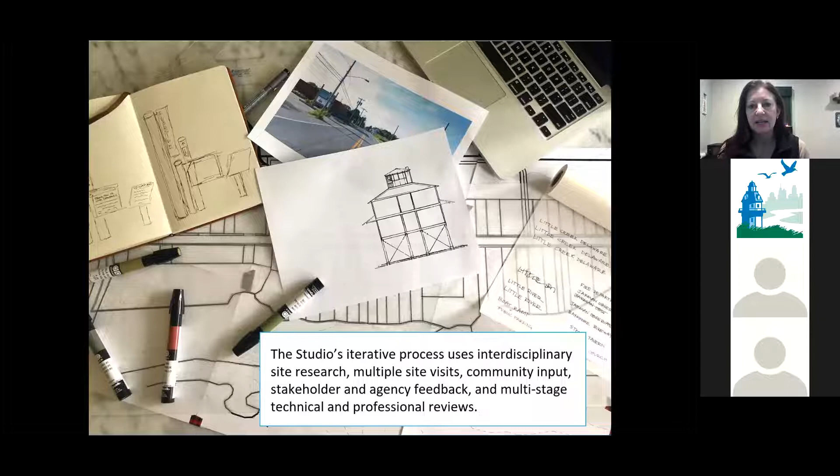I did want to mention that the studio's process is really iterative. The students get out on multiple site visits, we talk to community members, we hold stakeholder meetings, we look for agency feedback and multi-stage technical and professional reviews. So we have a process in place to make sure our students' plans are feasible and viable for the communities. We develop multiple ideas and solutions for communities, and ultimately converge on a recommendation to present back to the community for additional feedback.

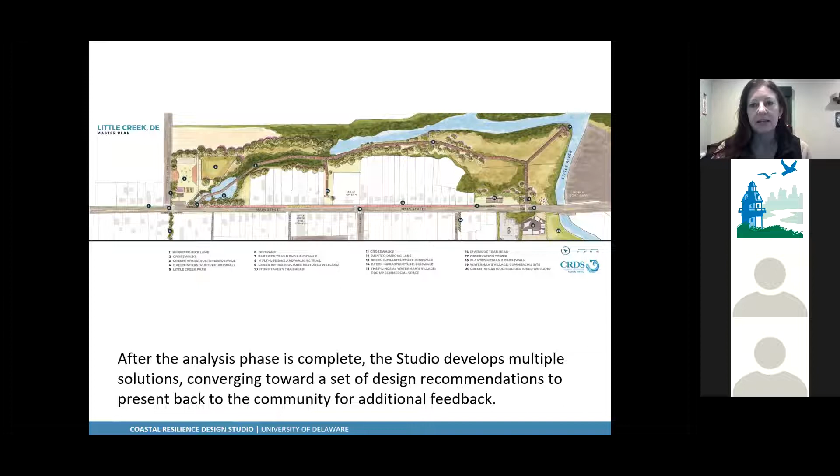What you're looking at here is the Little Creek Master Plan that we did for that community last year. It incorporates a lot of different elements, including green infrastructure and a new downtown redevelopment district in the commercial area, as well as walking trails. It was a very comprehensive project, and I'm going to share a little bit with you.

Ultimately, all communities are given 2 different documents. One is about our discovery process - the research that we do to create the drawings and designs that we end up using. Then there is the resiliency plan we give them that has all of our design guidelines. We've worked now for 2 years at these projects, and we're getting more of a process in place. We're pretty excited about how we're able to make a difference in different communities, like Little Creek and Lewes.

So I'll start with Lewes. This was our very first project. We were working at the DeVries Monument to help enhance the monument, but also create a living shoreline component.

In either coastal engineering or plant sciences, so I'm really proud of the opportunity that the CRDS gave them to work on their professional skills.

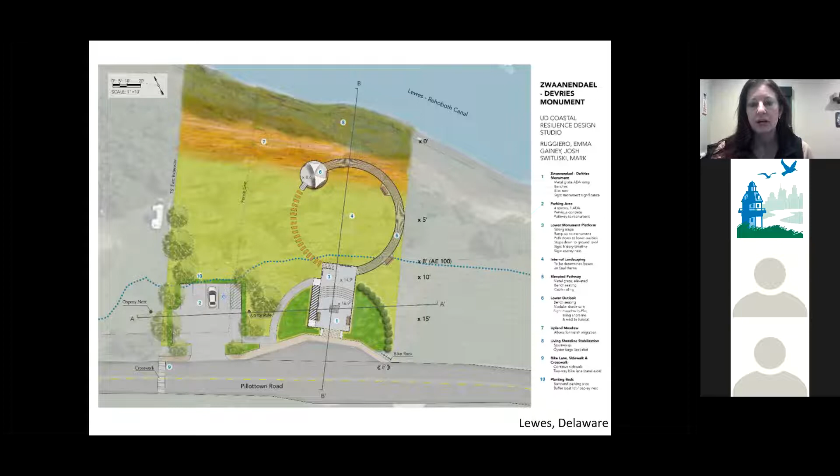This is the plan that group produced for the monument, and it has a lot of different components. It has a living shoreline with a lot of room for migration as we face sea level rise issues. There are two different layers on the shoreline, one with more aquatic plants and one that's more of an upland meadow that would be able to migrate up. It has a boardwalk and a lookout, but it's a very light treatment through the floodplain area, which is delineated by the blue dotted line. And then a new treatment that's a fully accessible place where people can come and visit the monument.

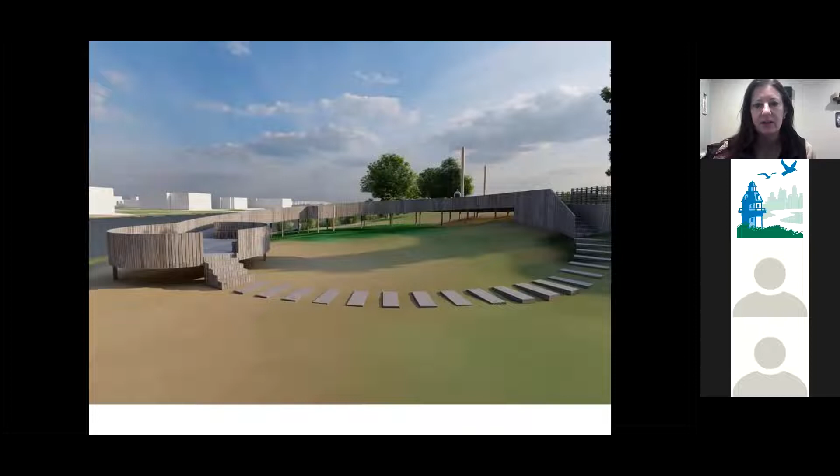The students are able to produce these beautiful models. This is actually a video, a snapshot from a video that was produced for this project. The video is quite beautiful and the water is like lapping up against the shore. The students have this ability to use these design programs that are just quite phenomenal and give the clients a really good sense of what the renovations will look like.

That's been a very successful project and it's still being talked about. There's been progress made on moving toward implementation, but as you all know, many of these things take many, many years to actually implement, so we're waiting on that one to come to full fruition. But we're very excited about the work we've done on the Lewes project, and we do think we could get started on the living shoreline component as soon as some of the COVID restrictions are lifted.

Including a branding project, our green infrastructure, we developed a new trail with trailheads and envisioned this idea of a bayshore bikeway, which was way out of scope, but the students got excited about the idea of bringing more bikeable miles to Kent County. We did Waterman's Village, which I'll show you in a minute, a micro retail concept to bring some economic drivers to the town. And we did a street calming project because Little Creek is really interested in slowing people down as they drive on the Bayshore Byway and get through their small town.

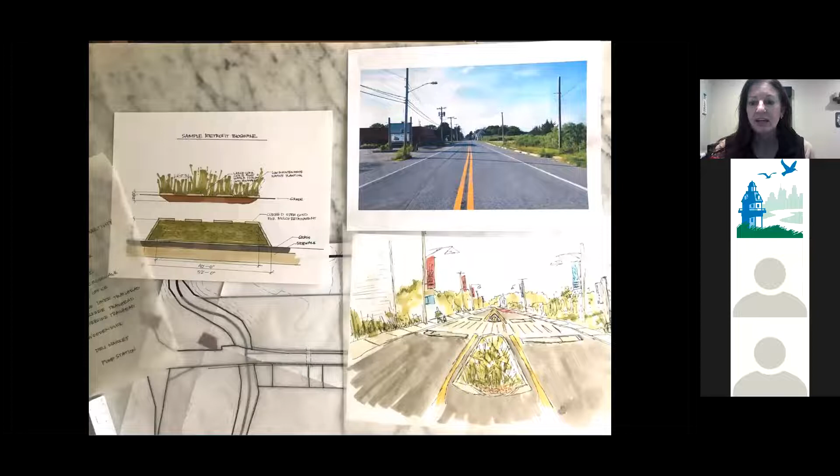We always start with a lot of research and conceptual drawings. You can see some ideas forming here for some of the traffic calming ideas that were coming through. This is the town before, obviously, and then we proposed that this is what it could look like after. Changing the color of the parking lane would narrow the apparent size of the streets, and adding the banners would be really helpful.

So we actually had the banners created. If you've driven through Little Creek recently, you might have seen that the banners are flying. We also have a new grill open in Little Creek, so there's really exciting things happening. And the town, also with the help of the Sustainable Communities Initiative, paid for their own banners and installation.

Recently we did a pop-up. I run a different research project called Living Lab that tests out some of the traffic calming ideas. We have this up in Little Creek right now, where we're checking to see if some of the design solutions that CRDS students came up with are actually feasible and will slow down traffic. We're doing traffic counts and trying to determine if people are slowing down as a result of the banners and these bump-outs and the different traffic calming devices.

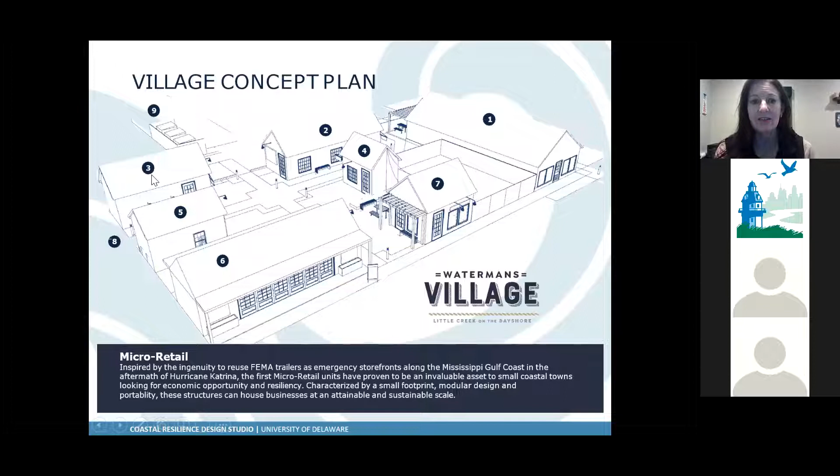There'll be big outdoor plaza areas. There's a plan now to make an ice cream shop right here. This will be a farmers market and produce stand, a bait and tackle shop, and a kayak launch. Several of the micro retail ideas haven't been quite defined yet.

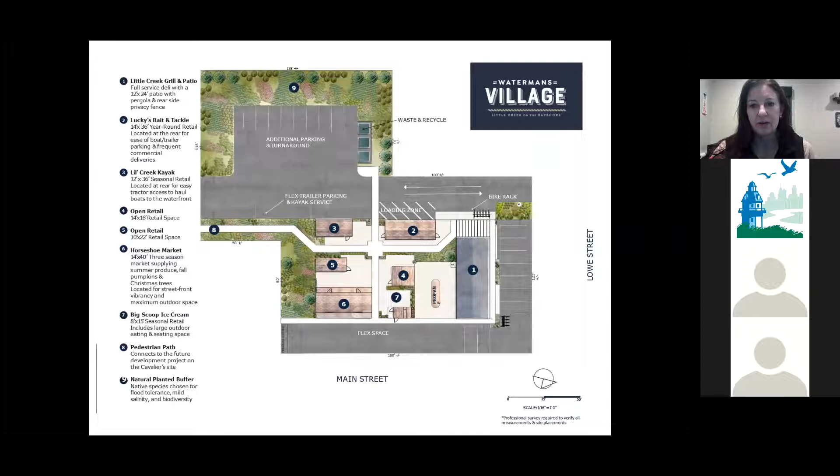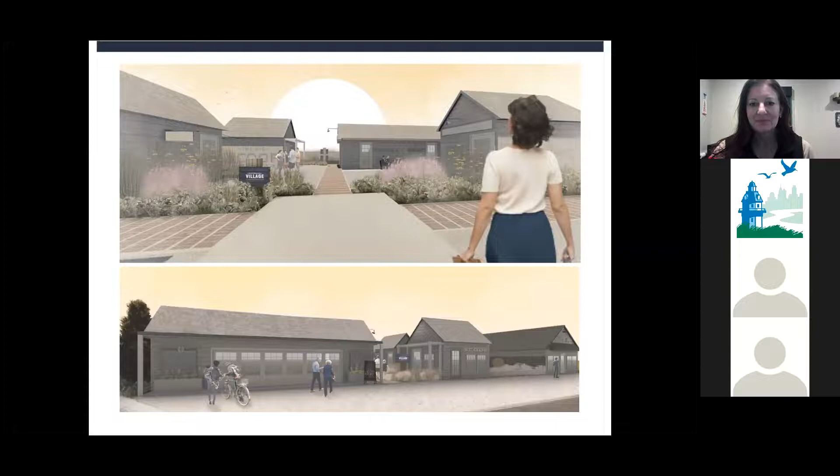We've actually got the UD Creamery ice cream truck coming down to do a pop-up demonstration of how viable this idea is to bring ice cream to Little Creek, among other things. The truck will be there in the next couple weeks on some set days, and they will count the receipts at the end of the day. That'll give the retailers better direction to understand whether it's viable to have an ice cream shop in this location, making money.

Another project we worked on this winter was the Tidal Market at Johnny Cake Landing. This is in the town of Frederica. The idea is that this is where your flavor journey begins. It's actually a farmer's market for the town of Frederica. And again, that doesn't seem like a coastal challenge.

I haven't shown you living shorelines or green infrastructure. We do design all that stuff, but like I said, we get involved with these other projects that are more economic based. Our students enjoy working on those projects too, because that can be the catalyst. That's what we're hoping the Tidal Market is—a catalyst that brings economic vibrancy to this part of town, which can then drive investment in green infrastructure.

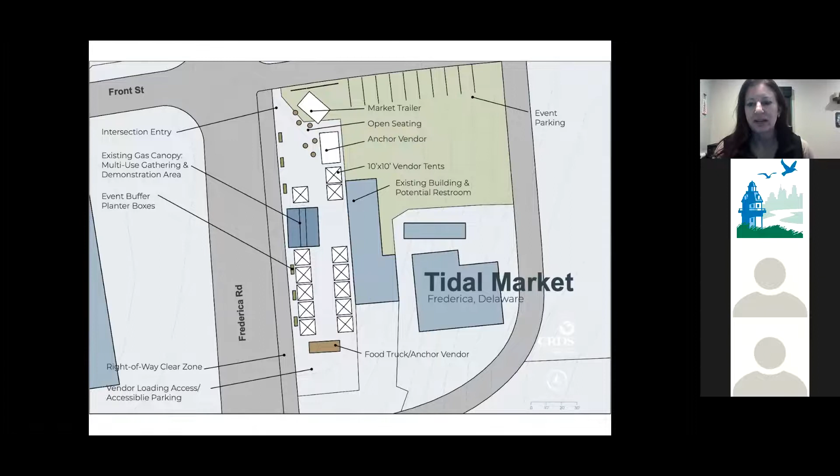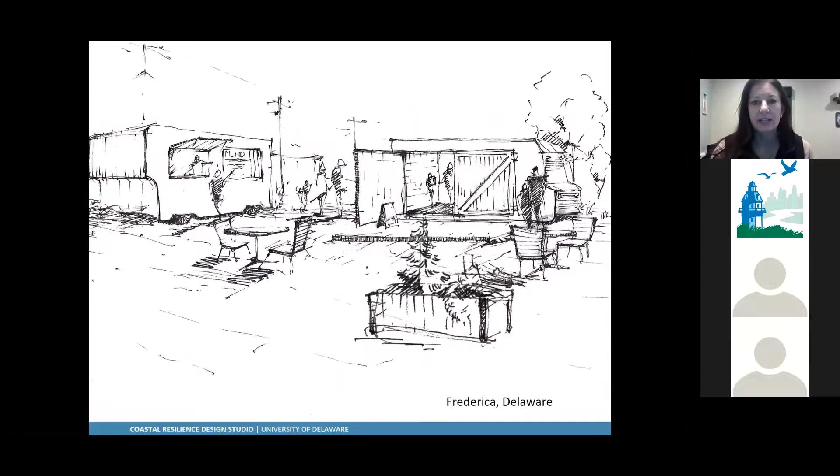The idea for this project is that we'll have a mobile market. It's going to be in a very prominent location, but if it needs to move because a business moves into the place where we want to have it, it can actually move. This is the location, currently owned by a developer, and they're thinking about what they're going to do with that place.

In the meantime, this is our vision of what the market will look like on Sundays in Frederica, taking advantage of the traffic you get from the Delaware turf.

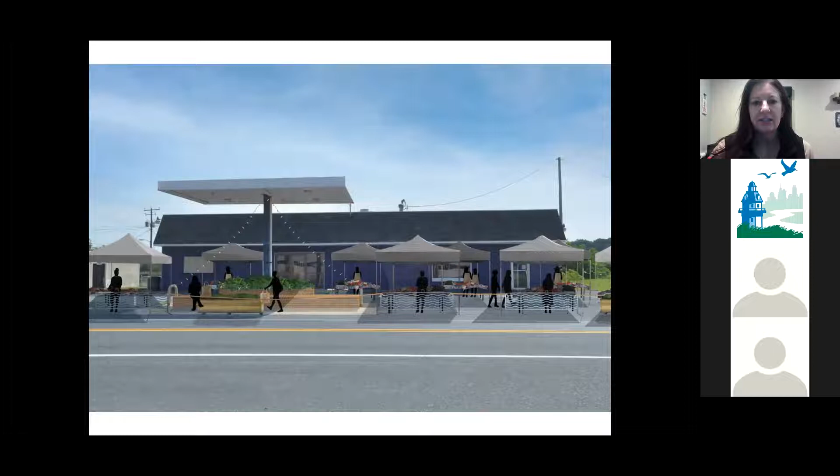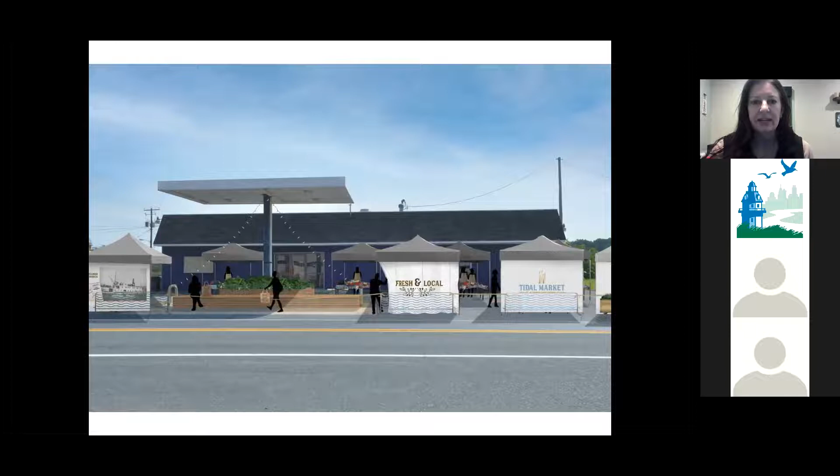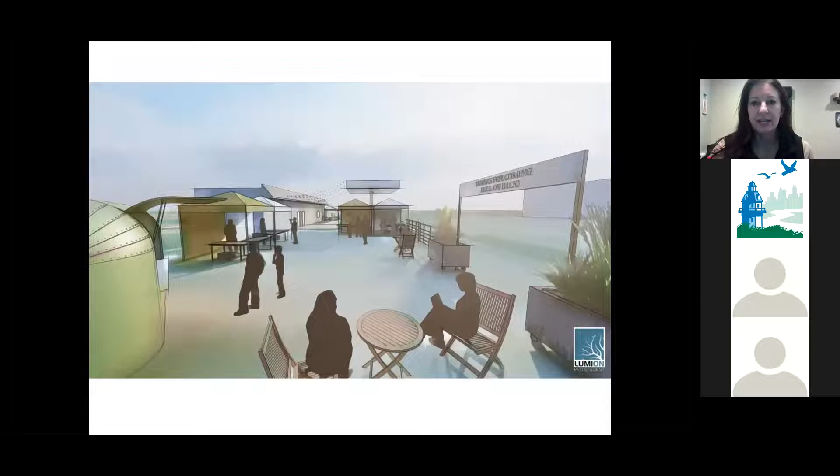As I flip through these slides, you can see different things we envision as part of the project—planters on wheels and tents with some local branding, just to make it a really great sense of place. If that market has to move to a different area of Frederica to become a catalyst for economic development, it can easily be taken down, put into a truck, and moved to a different location.

So our upcoming projects—we have several of them. We're planning on working on a design contest that's part of the Coastal and Estuarine Research Federation's conference in the fall in Hampton, Virginia. We applied to be designers in their design contest, and we'll be competing against six other universities to bring a coastal resiliency plan to the town of Hampton, Virginia.

Our students and I are going to take a trip to Hampton and do some research in early June. Then we'll spend the summer developing the same type of resiliency plans for the small part of Hampton called Phoebus, which is right near their old military fort. We're really excited about that because Hampton has unique coastal issues, but they're similar in some ways to what we're facing here in Delaware. I'm sure from participating in this multi-university design contest, we'll learn a lot of different things that people are doing in different places, and that can be applied back to Delaware.

We've contracted with Pickering Beach to work with them on some of their challenges related to their beachfront. We're excited about that project and brought on an environmental science and an environmental policy student, because they have unique habitat for the horseshoe crabs and the red knot. We're really excited to work with them. And then we're also going to be working on a project in Claymont, Delaware.

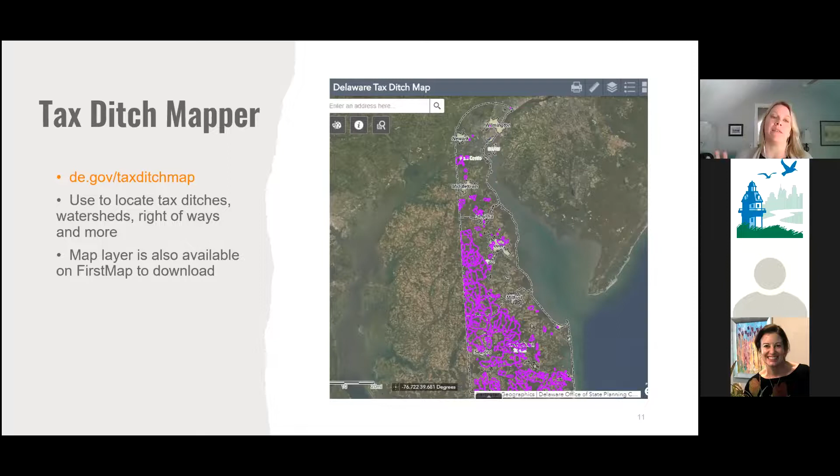Because of changes in the regulations, all new tax ditch right-of-ways for open channels are top of bank, they are not center lines. The only center lines are for pipe. And then there's another type of right-of-way called SAR, which is a special access right-of-way, and that is purely for getting from point A to point B to get to the ditch.

There's a lot of information when it comes to tax ditches. Basically, what you need to know is if you see a tax ditch, there's maintenance, there's usually a right-of-way, and in that right-of-way, you shouldn't put any obstructions in it, because then the tax ditch itself can't get to it to maintain it.

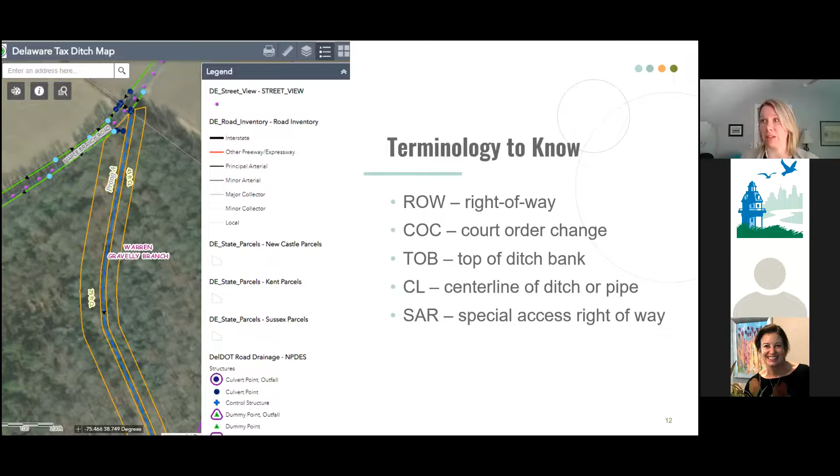So why pay attention to right-of-ways? Why pay attention to this sort of thing? What you see here is prong 3 existed in 2002. In 2017, it didn't exist. Our office was not consulted for a court order change, for one reason or another, not sure. But what now has to happen is, in order to get this prong 3 removed off of all of the landowners' properties in 2017, we have to get every single person to sign and agree to remove it.

But the problem comes in, you say, well, what does it matter? Well, if someone in that line wants to get a deck put on or a fence put in, they can't, because now there's a tax ditch and a tax ditch right-of-way, and you can't have a fence or a deck or any of that put on new because it's technically an obstruction.

So our office is trying to prevent this with land development reviews and everything, but any help we can get, we will take. So that is the tax ditch side of things, how it operates in a nutshell, and the different hierarchy of who's responsible for maintaining and doing what and how we operate.

Our program also has a public ditch or private side, also the resource conservation and development projects program. This side of our program handles more of the private concerns, not the tax ditch concerns, and assists in developing solutions to drainage issues that affect multiple partners. There is a list of different projects that is approved by the legislative committee, and they appropriate funds to help some of these projects go along.